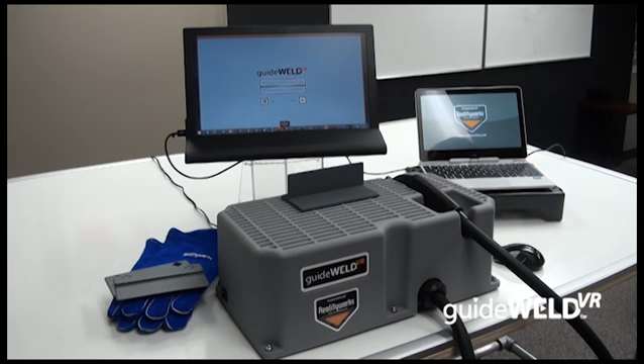We want to introduce to you today guideWELD VR, part of the 21st century welding solution from RealityWorks. guideWELD VR comes with a workstation that hooks right up to your computer.

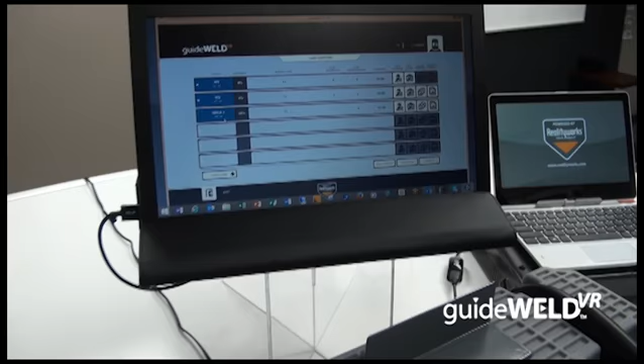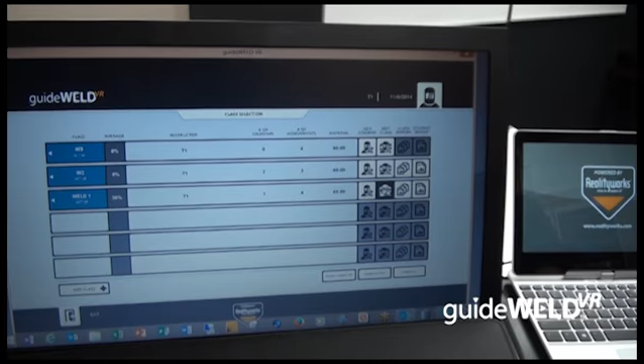I'm going to go into the teacher account, and inside the teacher account, what a teacher can actually do is they create classrooms. In this case, I have 3 different classes. They can then add the number of students that they want because there's unlimited licenses. After that, they can create WPSs and edit their class. So I'm going to click on that and show what that looks like.

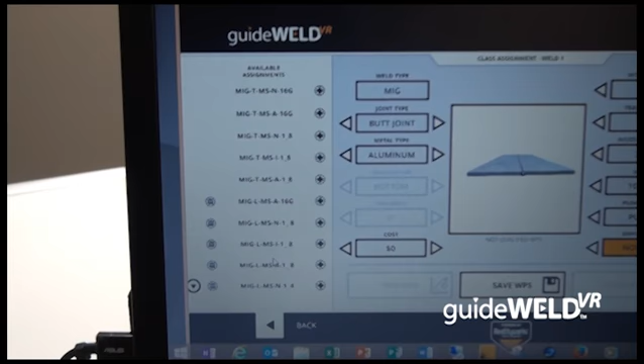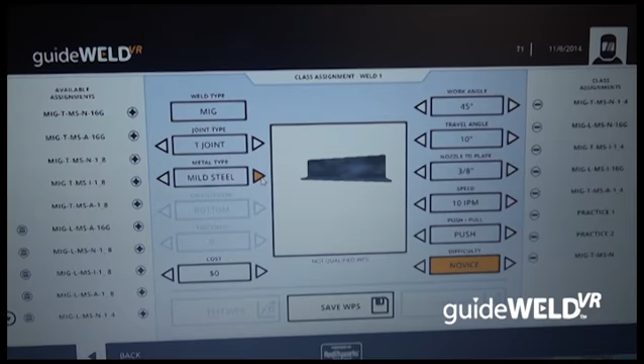In this case, we have 27 default WPSs or assignments that are already put in the system. They also have the ability to, in this case, change their joint type from butt joint, lap joint, and T-joint, metal type from aluminum, mild steel, stainless steel, and then they can add or change their work angle, travel angle, nozzle plate distance, speed, a push or a pull technique, and then difficulty level.

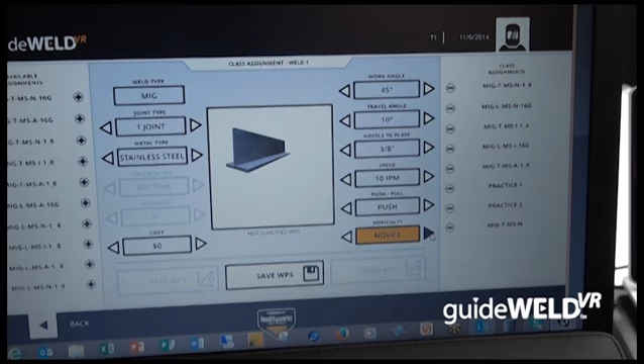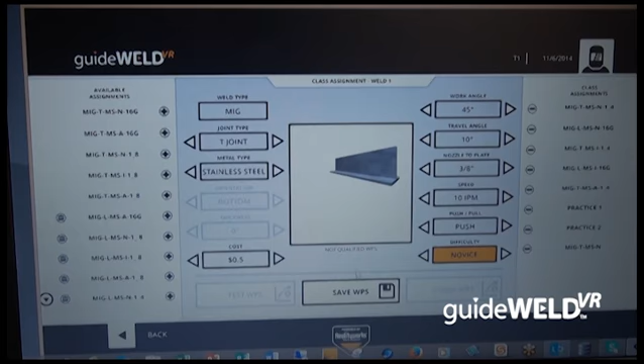All while doing this, they can also add a cost of the product, of how much it would be to actually weld this piece of metal. Once they get what they need, they can save their WPS, creating a new assignment and add it to their classroom assignments here. These are all assignments that their students then can go in and practice and simulate the welding of those assignments.

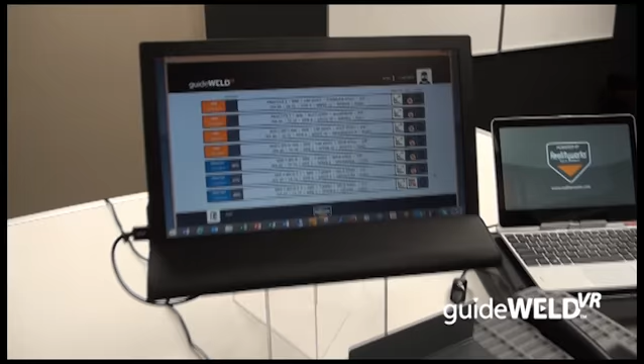The student will log in. They have a login that the teacher has provided. You can have as many logins as you want. And inside here, you can have the student actually see what the different assignments are. It tells them what their work angle should be, their travel angle, their nozzle plate distance, their speed, and then also what type of difficulty level it is, and if it's a push or a pull.

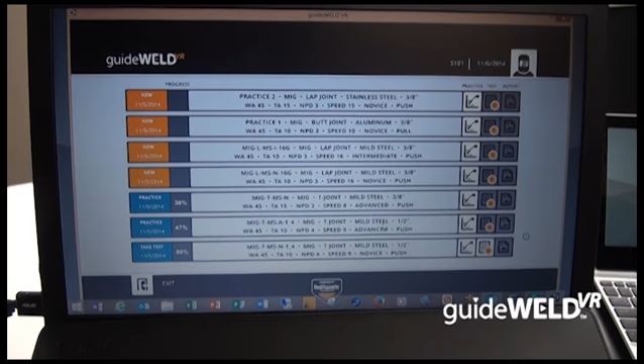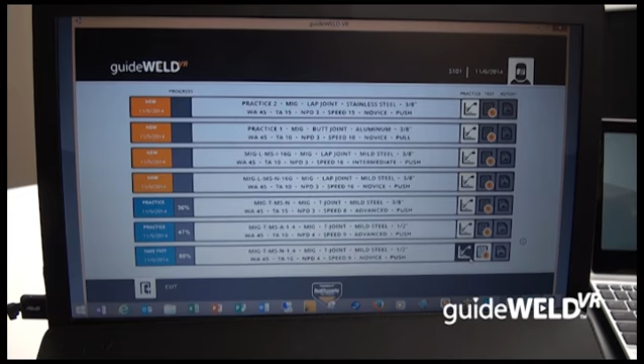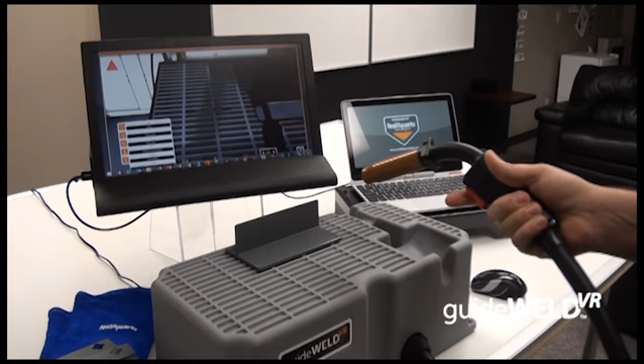When I come in here then, I can also do a practice, I can take a test, and then I can also see a report of that test showing me what I did. So we're going to go in and do a practice here. I click on the practice. Now, inside of my welding world, I actually get my physical gun, and everything that I do in the physical world is going to show up in the virtual world.

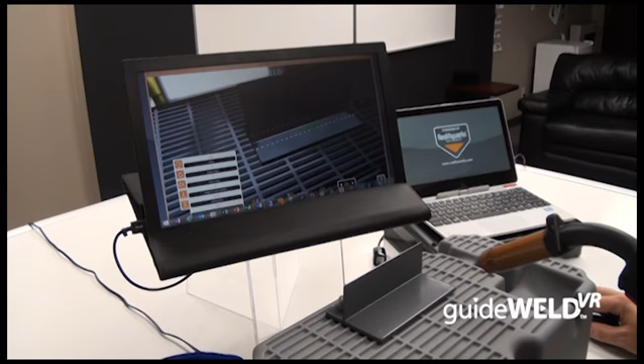I first have to tack my plate into place here. Once I've tacked my plate, I can then move and get into the position that I want to actually do my welding at. Inside the simulation, I have different icons. Up in the corner here, I have my travel angle telling me to get into the correct position. In the left-hand corner, I have work angle telling me if I need to be in correct position or if I'm out of position.

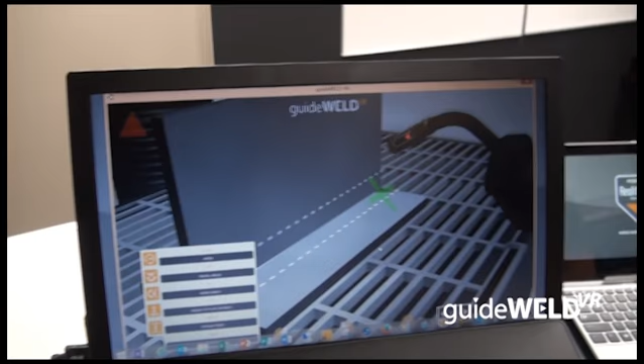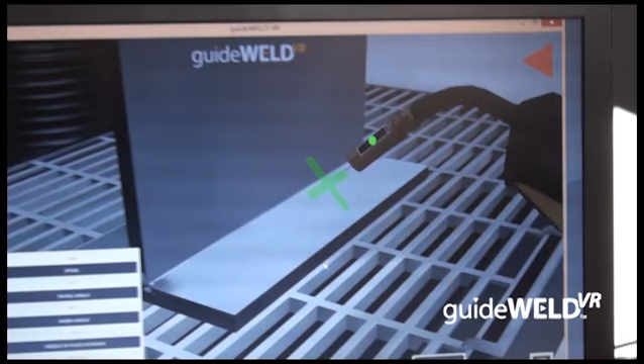And then I have a speed guide right in front of the gun telling me a plus to go faster or a minus because I need to slow down. And then on the gun itself, I have your nozzle to plate distance, moving in and getting to that speed. And then I have my lines for straightness. I can turn these on or off.

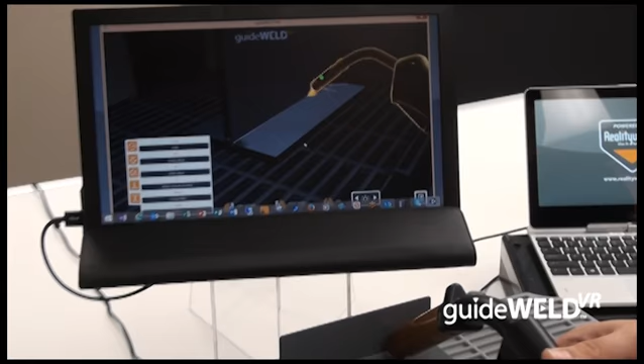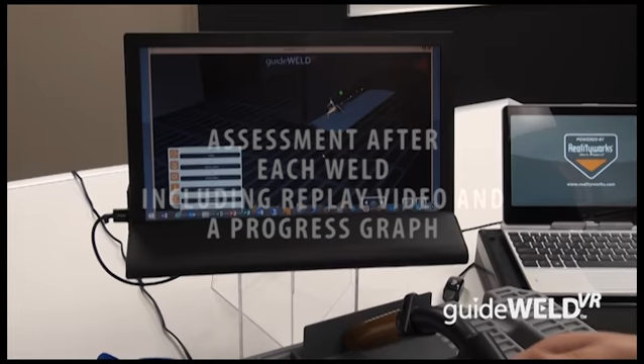Get into correct position. Once I get in correct position, we have what we call the golden gun, showing the student that they're in correct position and that they're practicing perfectly. Once I go through my weld, I can then save my weld. In this case, what you'll see is it'll give me a score for work angle, travel angle, plate distance, speed, and straightness. It accumulates all those and it gives me an overall score.

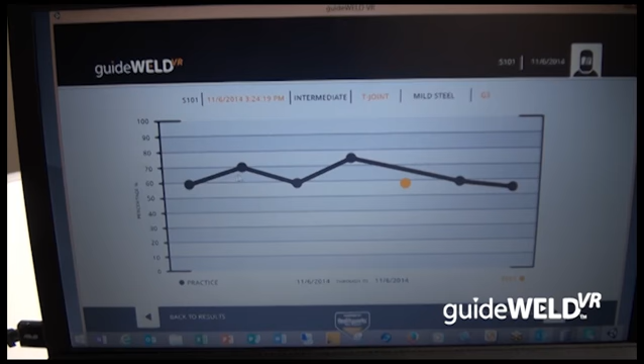Gives me a video where I can go back and replay and watch what I just did. It also gives me weld progress, so I can come in and see where my progress is, how well I'm doing from one practice to the other, and it also charts my tests and how I did on the tests.

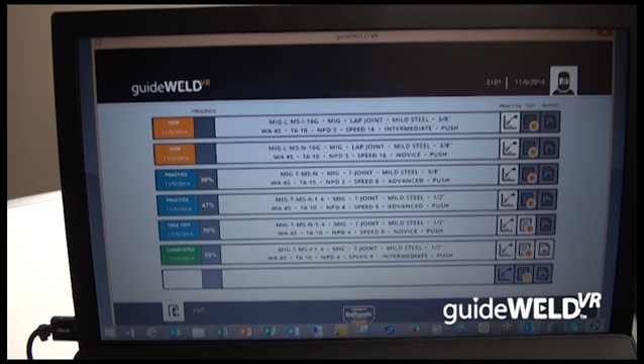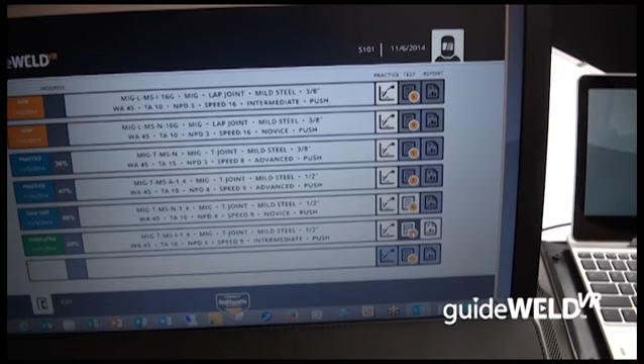When I go here into the assignments then, if I get past a 50%, it opens up the test area. The only difference in the welding world for the test is that it doesn't have the guides now, so there's no way that it helps, but it actually gives me that information. And then it also gives me results so I can actually see what my score was. When I'm done here then, I can exit out, and that is the overview of the guideWELD VR system.